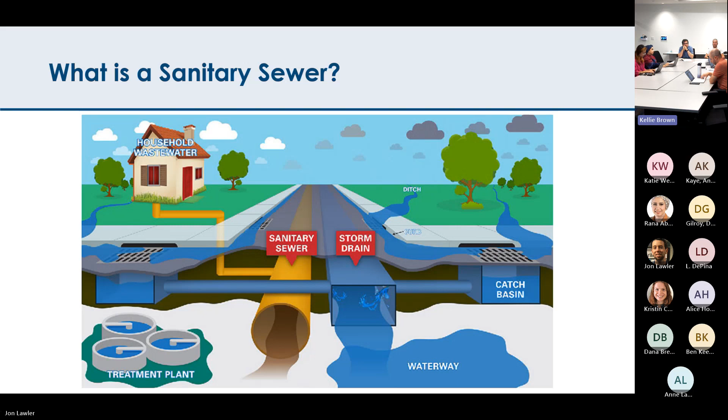That's also why you'll find both sanitary sewers and storm sewers in people's backyards, rear yards, and side yards. And that's where we run into conflict—sometimes people add additions to their properties, and there's a sanitary sewer too close to it.

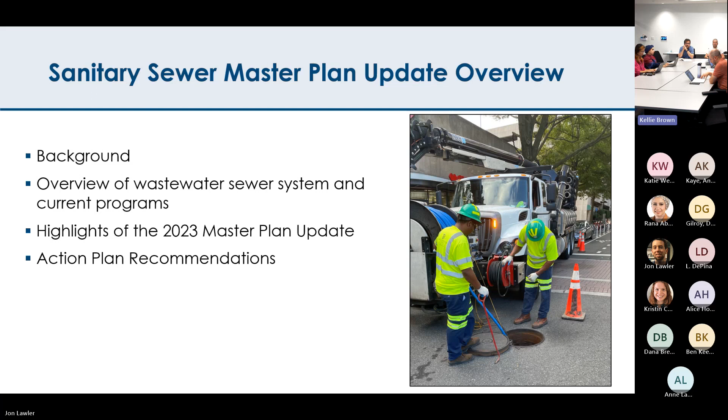I'm here tonight to present the sanitary sewer master plan update. I'll give background on the master plan, an overview of our wastewater sewer system and current programs, highlights of this 2023 master plan update, and then summarize our action plan recommendations. This is one of the 11 elements of the county's comprehensive plan—I know there's soon to be a 12th one coming with natural resources.

The comprehensive plan was established by the county board in 1960, originally consisting of 5 elements, with sanitary sewers being one of them. Your ability to grow as a county really depends on your sewer system and water system—those are critical utilities that can constrain things if not planned properly.

In Arlington, our sewer system began in 1933 when voters passed a referendum in November to create a public countywide sanitary sewer system. Prior to that, there were just a few private sewer systems spread throughout the county. People had septic tanks, outhouses, or outfalled private sewers into streams. The county built its whole network over about 4 years and built the treatment plant, which opened in 1937. So those are the origins of our system.

The master plan evaluates the system facilities, practices, programs, policies, and improvements needed to provide and maintain adequate service into the future. The most recent update was adopted by the board in 2002. This is a planning-level document; the primary goal is updating growth and development forecasts, looking at capacity assessment to ensure sufficient capacity for demands, identifying needed system improvements, and evaluating our ongoing rehab, operations, and maintenance efforts.

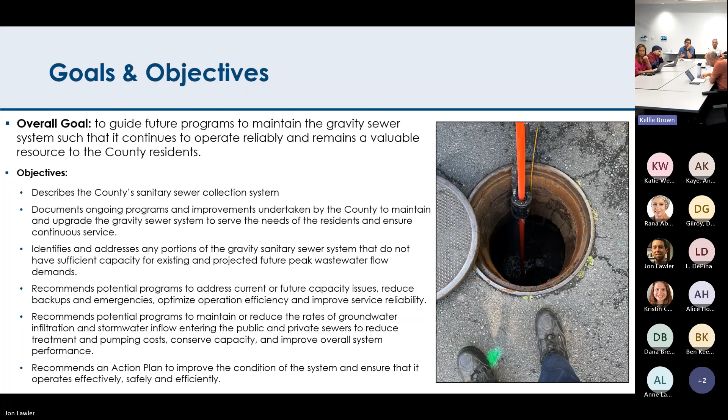So I'll start by giving an overview of the sanitary sewer system. It consists of 459 miles of gravity sewers. Basically a gravity sewer consists of a sewer main connected on both sides by manholes. We have approximately 15,000 manholes.

We have 15 sewer lift stations and about 4 miles of force mains. A force main is a pressurized sewer. You'll see a lot of those on Military Road where you have these big hills up and down, because by gravity you can't go up a hill, so you need to pump that up the hill.

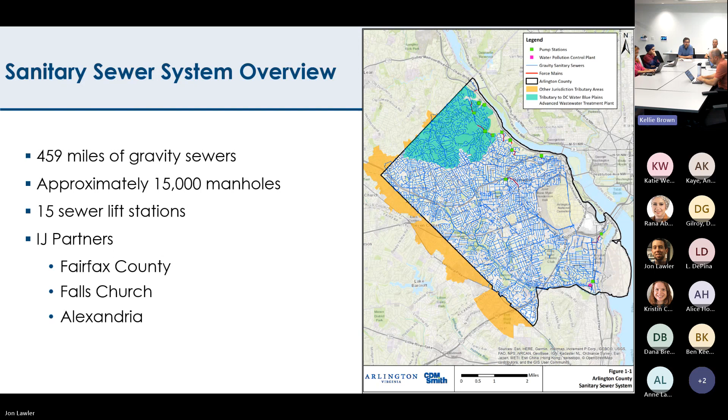We call these kind of like roadway networks - we have arterial streets, collectors, and local streets. In sewers, your interceptors are your arterial sewers, trunk sewers are kind of your collectors, and sewer mains are your local ones. Basically everything under 15 inches, like 8 to 12 inches in diameter, is local. 15 up to about 30 inches is trunk, and everything above 30 inches diameter is the interceptor.

So we'll talk about common sources of sanitary sewer infiltration. This is really critical in sanitary sewers because, as I mentioned, they're smaller than storm sewers, so they can get really overwhelmed if you have lots of stormwater and groundwater infiltrating into them.

Sometimes people put illicit connections like roof drains plumbed into the sanitary sewer system. We'll find those when we do our CCTV work. You might have uncapped cleanouts or cleanouts with vents on them to try to relieve odors from the house. And then you also sometimes have faulty manhole covers and frames that aren't watertight, or might have a hole or two in them to get them open. All that allows stormwater to inflow into the system.

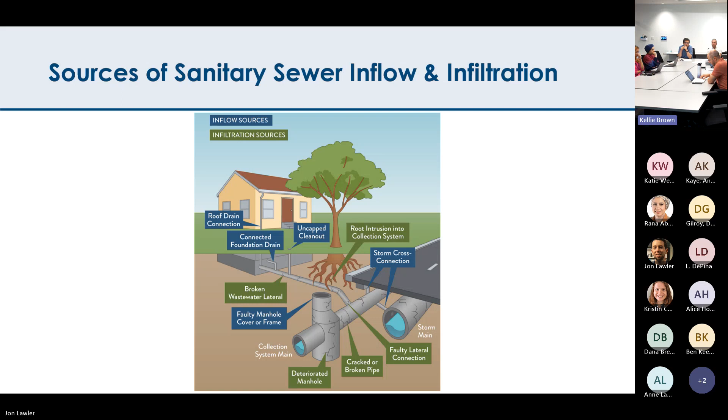Basically we were at 30 MGD back in the mid 90s, and now we're down to 22. MGD is million gallons per day, so that's quite a big reduction. We're permitted for 40 MGD, so we have lots of capacity there.

We began a really robust sewer lining program in 1998, intended to reduce that I&I I was just talking about. We think that's also had a big impact on reducing flows to the water pollution control plant. As I mentioned earlier, the area in North Arlington that drains to Blue Plains is only 1 MGD, about 5% of our total flow in Arlington. Even though it's a fairly large area, it's almost all just single family houses, so it doesn't generate much sewer flow.

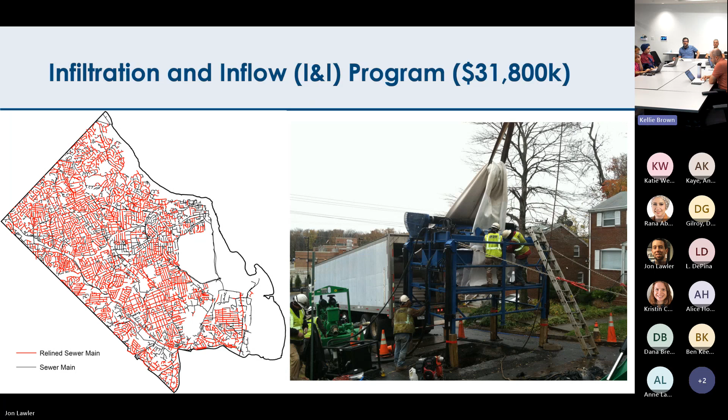It's not intrusive really at all to the residents, whereas if you were to actually dig up the road and replace the sewer main, that'd be a couple of weeks of parking restrictions and lots of dirt and dust, because these are very deep systems.

We're also just doing a couple percent per year so that we don't end up doing like half the county in one year, and then 40 years from now we'd be kind of screwed. So we're spacing it out really good to keep it well maintainable in the future. We're basically on track to complete all the small diameter linings by 2031.

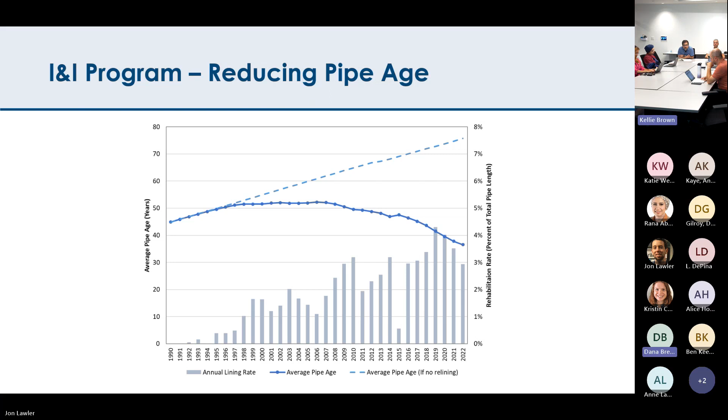That leaves larger diameter rehab - that program focuses on pipes that are 15-inch diameter and larger. These are much more complex; they require these intricate sewer bypasses. That's what you see in the picture on the right, where we have a sewer bypass, the 4-mile run interceptor sewer that crosses the 4-mile run trail.

So you have the trail temporarily elevated over the bypass. For the bypasses, these are just above ground - we use pumps to keep the sewer flowing because we've got to get that pipe fully dry and cleaned out before we install that liner. On the left, there's the liner machine.

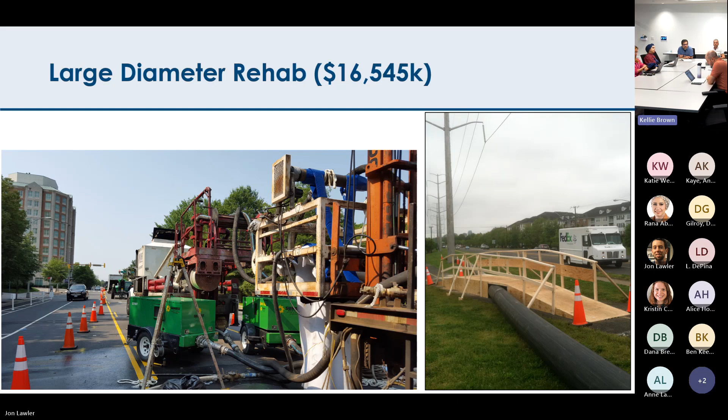From large, the CIP program includes inspection and rehabs. In the sewer main replacement program, that's where we have to dig and do replacements - typically spot repairs or new mains to solve certain design issues. That includes our stub elimination program. A stub is where you have people connected upstream of a manhole, but there's no manhole upstream of them, so there's no way to clean that line to serve those properties. We've knocked out a whole bunch of those, but we're still down about 300 or so left.

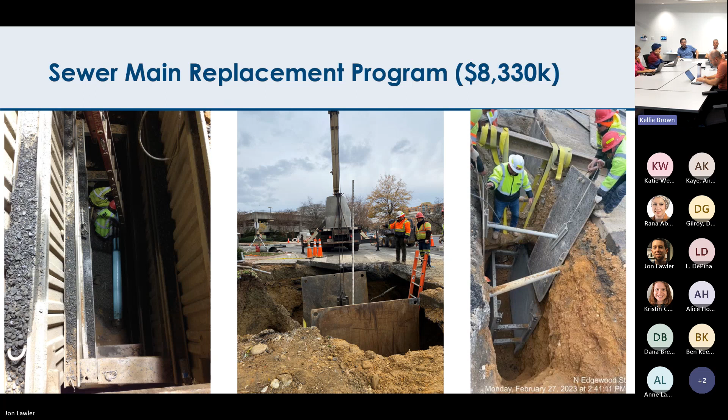Because there's all kinds of underground streams throughout the county that you don't know about, you end up encountering a bird's nest of dry utilities when you're digging that deep. Those are utilities you have to deal with when laying these pipes. It's very challenging, requiring a lot of specialized equipment.

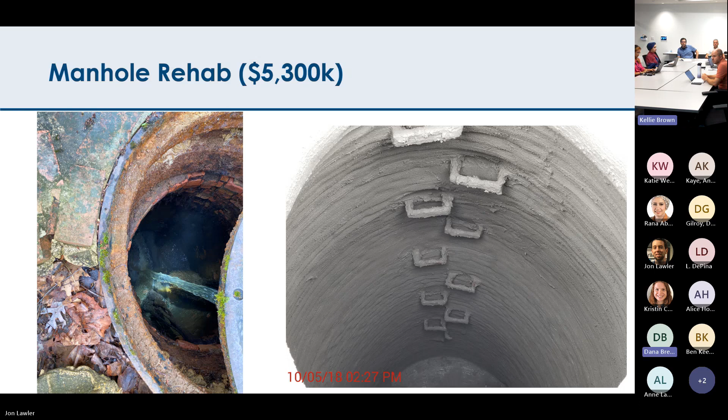Now I'll go over our preventive maintenance program. That's basically our biggest program for our internal staff resources, so this is what we spend most of our time with. We have 4 county crews dedicated to flushing sewer mains.

Flushing is really critical because most backups are caused by debris in the line, which blocks people's flow so it backs up into houses, and they call the county. So you go back out, flush the main, and that fixes the problem. These preventive maintenance areas are where we have to flush on a frequent cycle, made up of three programs: grease, trouble, and tree root.

Grease areas are on a 1 month or 3 month cycle. Trouble can be 30, 90, or 180 days. Tree roots aren't on a regular cycle, they're on a 5-year cycle. For those with tree root issues, we take a root cutting nozzle, put it on our flusher, cut all the roots out, and then put a root inhibiting foam into it. Every 5 years we go back and apply that foam, which discourages tree roots from getting into the sewer main and messing things up.

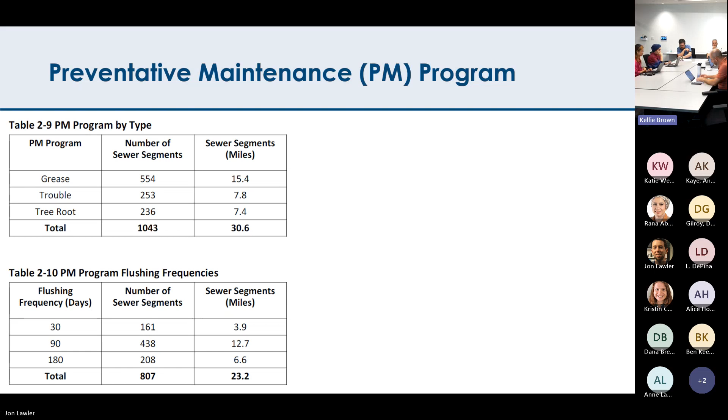The grease issue is obvious - that's where restaurants or caterers are dumping grease down the drain, which blocks up the sewer main, so we have to flush and vacuum it out. Troubles are usually where we have poor slopes - if the sewer main doesn't have a steep enough slope, solids can settle at the bottom and cause a blockage. Those are the ones we have to flush for that reason.

Things like that, and hopefully that will help reduce grease areas. But then you also see random red lines throughout the county, and we're investigating those to try to see which house is contributing to the problem, because obviously somebody is running like a catering business or something at that house.

Now we'll look at trouble. Like I said, these are the ones with inadequate slopes where you're just not getting that self-cleansing velocity. They're spread out all throughout the county, and by keeping these on a frequent cycle, we can prevent backups by servicing them often.

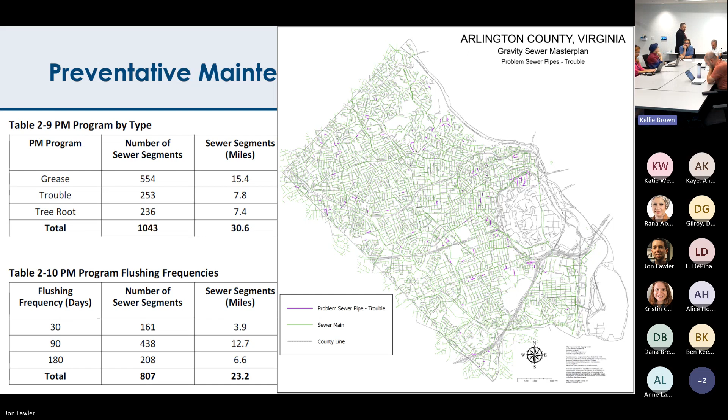Our other major program is the grid program. We spend so much time on these preventive maintenance sewers that unfortunately we don't have a lot of time for the other sewers. Our goal is every 5 years to flush every 12-inch diameter and smaller sewer at least once. Unfortunately, over the last 5 years, about two-thirds of the sewers we haven't even gotten to, just because we spend so much time on grease, trouble, and stuff like that.

So the master plan really tried to figure out how we can start achieving this goal. We basically need to adjust utility billing so that we can generate an extra $330,000 a year to give all these remaining segments to a contractor to handle.

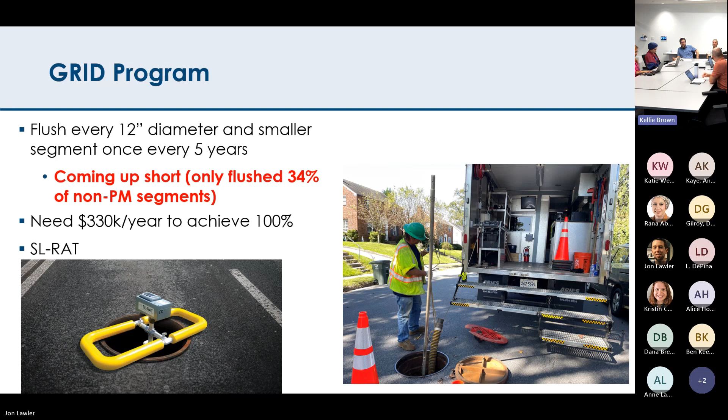The other picture on the left is the SLRAT. That's a little tool we use to see condition using an acoustic signal it sends. You put it in upstream and downstream manholes, it sends that acoustic signal, and that gives you a score. Based on that score, you'll know if you need to flush it or not - it just detects if there's a blockage in there, helping you decide whether a line needs to be flushed. But the downside is you also need traffic control, because sewers are typically in the middle of the road, so you can't just have that sitting out there with traffic going by.

That'd be considered very good. If you adjust for us, remember we're 459 miles, that would be 92 backups per 1,000 miles. So we're way under that benchmarking goal, which means we're doing pretty good. Some of this is also affected by how data has been reported by staff and turnover, so it changes a little bit.

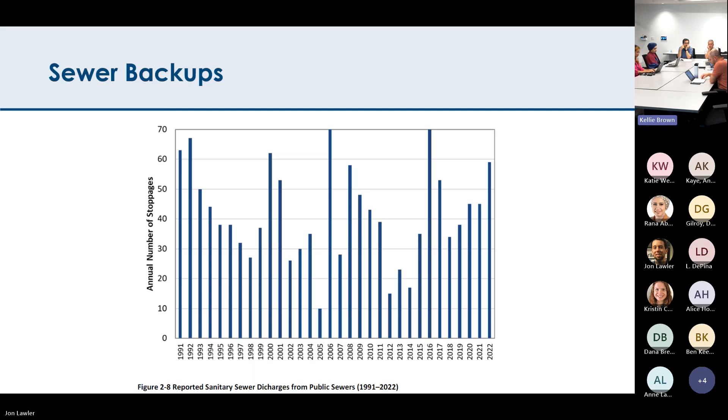So most of these backups are on the private side, where people's homes have issues and stuff.

Asset management is really critical to public works departments, making sure you're documenting all the assets you maintain, when you're maintaining them, how much it costs you, keeping records of all that stuff. We're really national leaders on that front.

We use this Cartegraph asset management system. So all our sewer mains are in there. We track all our maintenance activities. It has when the install dates were, when they were relined, when they were retired, when we flushed them, when we mined them, when we TV'd them, everything. We track backups in here too, everything now.

So for example, you click on a sewer main in the county and see the work history, and then it also calculates a life expectancy, and you can kind of prioritize your replacement program based on that.

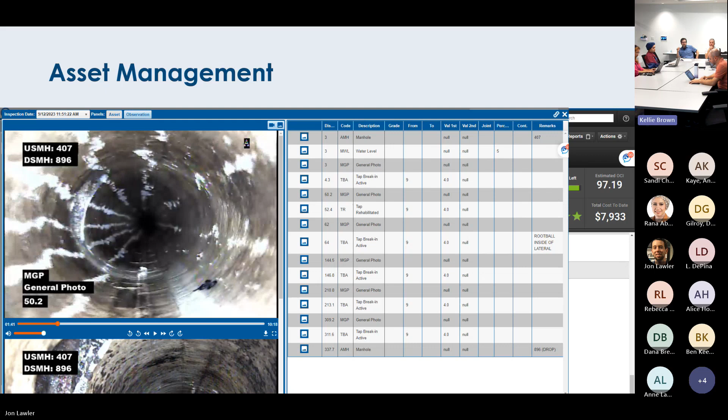Basically our operators use an Xbox controller to move a crawler inside the pipe, and every time they see a defect, they take a picture of it, make a note of it, and assign it a score. All our CCTV is electronically in there on the cloud, and it links up to Cartegraph.

Back to the master plan, one of the big things is just making sure you have adequate capacity for future growth and development.

As part of our master plan, our consultant developed a dynamic sanitary sewer system model of all the county sewers. Previously we had a SewerCAD model of just the larger diameter sewer, so this was a big upgrade.

So we can click on any sewer segment of the county and see the flow, the dry flow, the wet weather flow, any kind of flow, over the future conditions or the existing conditions. It's really a great, helpful software.

To calibrate and generate the model, they did a lot of flow monitoring in 2019, as well as using water billing information from that period. The water billing information is used to generate the dry flows, to know what's in your system during a non-rain event. Then the flow monitoring tells you how much I&I you're getting in your system during these rainstorms.

The future conditions model is the 2045 future condition model, based on the COG, the Council of Governments. They publish a regional population land use model, and the one we used was Round 9.1. That has the population and employment figures for Arlington County that they project for 2045, based on all our approved land use documents and stuff.

The only change we had to make was to add HQ2, because that wasn't quite in there. Based on what happened during COVID, that's now a very conservative model, but we still used it in our analysis.

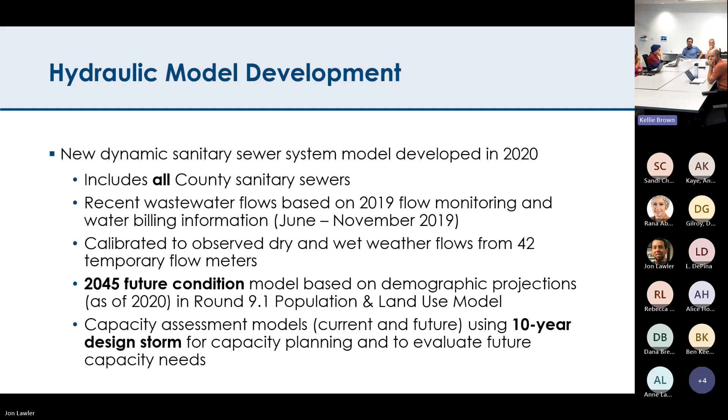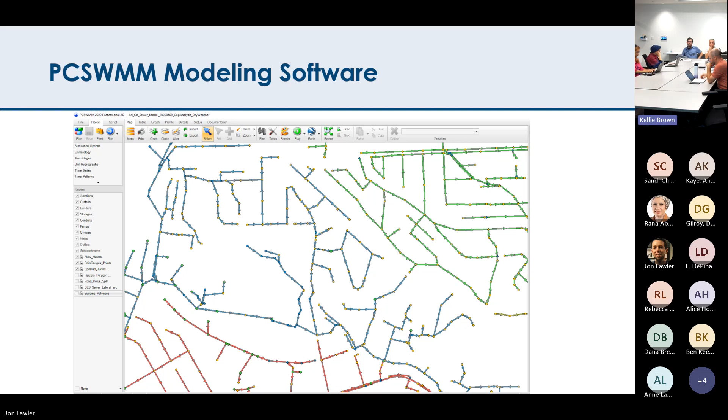Here's a shot from our modeling software, it's called PCSWMM. Just a shot of what it looks like - it's really easy to use and gives you a lot of great information.

The model found really great results - the county has excellent capacity with tons of spare capacity, probably because of decreased water use over the past 30 years. It showed sufficient capacity for both existing and future dry weather conditions.

We only had one simulated overflow in the 2045 wet weather conditions. An overflow is when sewage would be shooting out the top of a manhole. We also had 3 surcharging sewer segments in the 2045 wet weather conditions, but they still had more than 1 foot of freeboard, meaning nobody would actually be backing up in those spots because it would all be below where buildings connect to the pipe.

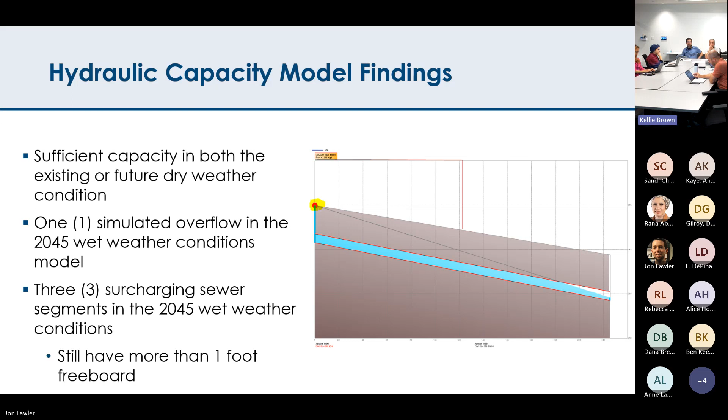I'll talk about where the overflow was simulated. That was on North Oakland Street, just south of North Glebe Road, kind of up near Ethan Allen Pump Station off Military Road - that's where our Gulf Branch force main outfalls into the gravity sewer.

We actually have plans right now to upgrade that pipe so we can resolve this issue. That project will start construction in spring of 2024.

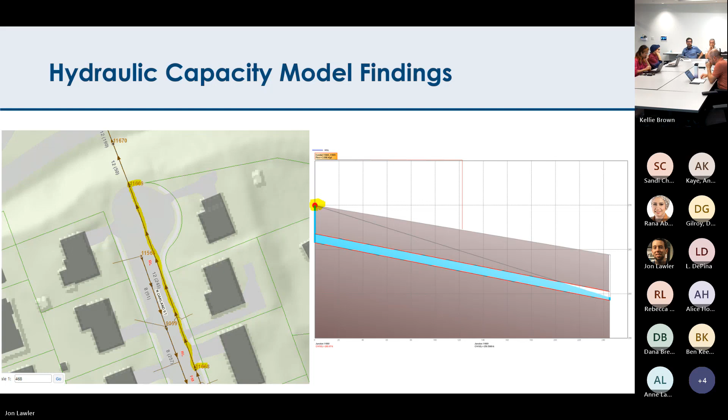Lastly, I'll summarize our action plan recommendations. These are developed in more detail in the actual plan document, but basically we want to achieve that GRID program, so we want to increase our operating funding by $330,000 a year to do that.

We want to add flushing of all our 15-inch and 18-inch diameter sewers once every 5 years. That's actually not very expensive, like $33,000 a year. Our crews don't touch anything larger than 12 inches because there's so much flow in there, and it's just very toxic, so we use contractors for the larger diameter stuff. You really don't need to flush things larger than 18 inches because there's so much flow that it keeps itself clean, unless you get some huge blockage. The contractor has great equipment to flush the 15 and 18 inch pipes, and it's only $33,000 a year, so we thought that was a good thing to add.

We'd like to accelerate our large diameter inspection from 2.1 miles a year to 4.4 miles a year, so over the next 20 years we can see all the remaining large diameter pipes we haven't looked at. Large diameter inspection is more difficult because there's so much flow in the pipe that you almost have to bypass it to get a good shot. If you do it under flow, you're only going to see about half the pipe, so you'll miss a lot of defects.

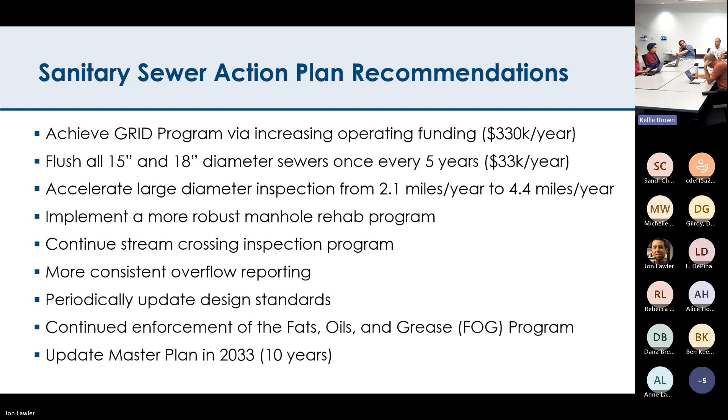Continue enforcement of the fats, oils, and grease program, and update that as needed as it gets older. Then just update the master plan again in 2033, which would be 10 years from now.

Really our next steps are to hopefully do the request to advertise hearings this fall, and then go to the county board for adoption at the December 16th meeting. You can provide comments on the sanitary sewer master plan, or just Google Arlington County Sanitary Sewer Master Plan and it'll take you right there. Then you can email me your comments at jlawler@arlingtonva.us. If you have any questions, feel free to contact me.

Thank you very much. Since now, do any of the commissioners have any questions or comments about the proposed plan?

I have a couple. Glad to see that you're now telling the story about our capacity and that you plan for the future on this. My takeaway is that at least through 2045, both our sewer system and our sewer treatment plant have more than enough capacity for the expected population growth. That's correct. Okay, and that our sewer system itself is in pretty good shape, that we've been renewing it over the past number of years so that the large majority of sewer lines are effectively new. Yep, okay good, that's good to know.

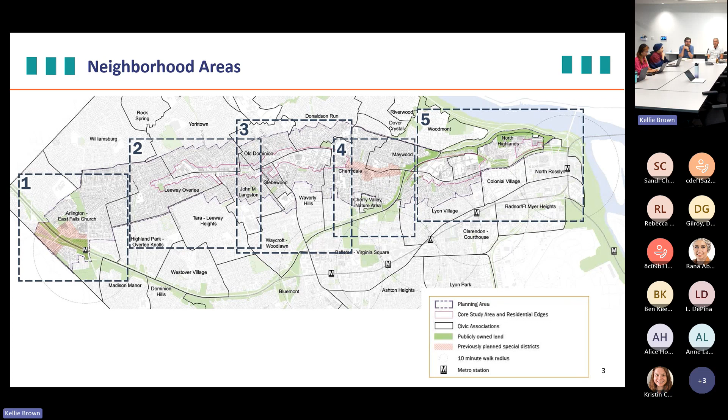As I'm sure you're all familiar with, we have been looking at the Langston Boulevard corridor over the course of several years to develop a new plan for the corridor. This is the entirety of the planning area, shaded in dark gray, with the distinct neighborhood areas indicated in these boxes on the screen. We have been in this planning process for several years.

We are drawing near to the end, at the end of phase 3, drafting the plan, and really moving into refining the plan and recommending plan adoption, which also is recommended to include certain implementation items to allow for the plan vision to be realized. That's what we're here to discuss tonight. The planning process has resulted in a plan vision that's being recommended in the plan.

I don't necessarily need to go through all of this material. I think it's been presented in the past at different LRPC meetings and in the draft plan. But I did want to mention it tonight, that it's really anchoring what we're recommending in terms of general land use plan amendments, sustainability, environmental resilience, and equity at its foundation.

There's also policies and recommendations in the plan in distinct issue areas: land use, economic vitality, housing, public schools and facilities, building form, historic and cultural resources, and with regards to the public realm, transportation, connectivity, and urban design, public spaces, and sustainability and resiliency. The plan also includes design guidelines and principles that should guide future reinvestment on the corridor. So the plan does have specific goals for each of those topic areas.

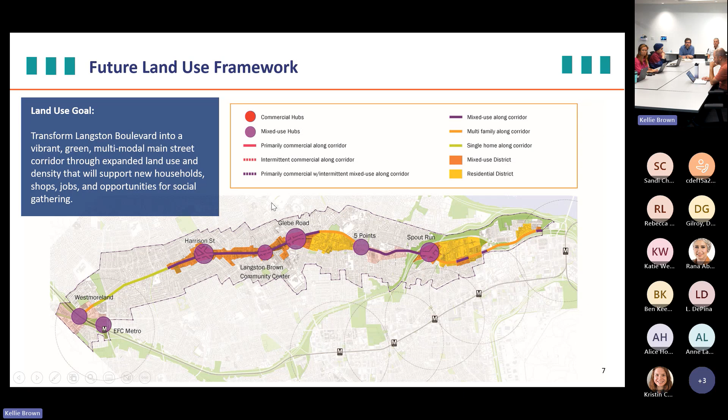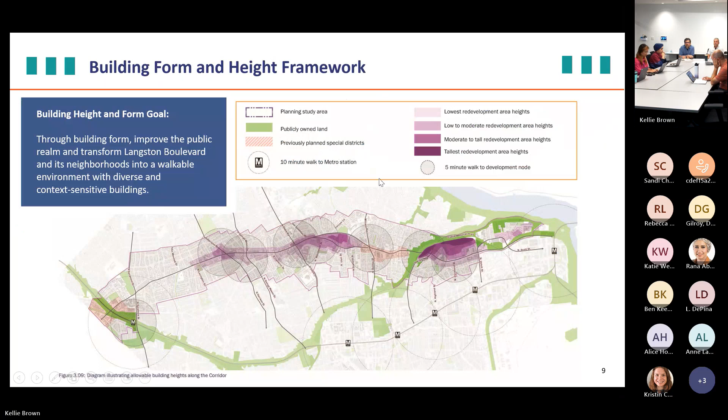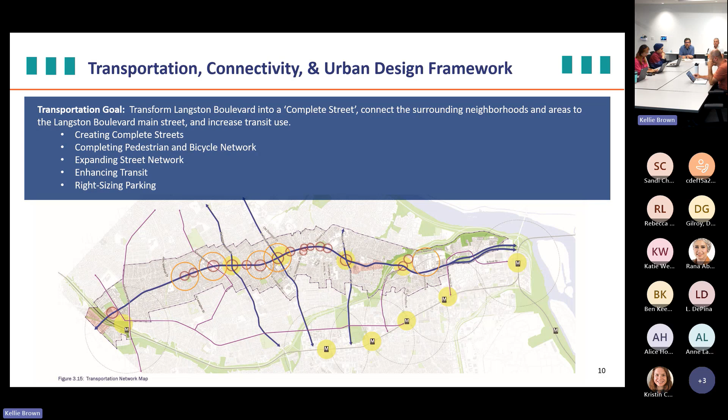There's a specific goal for land use to transform the corridor into a vibrant green multimodal main street for expanded land uses and density. There are goals for housing to expand equitable housing choices. Goals for built form and height. Goals for transportation, connectivity, and urban design, really transforming the corridor into a complete street that connects with the surrounding neighborhoods and increasing transit use.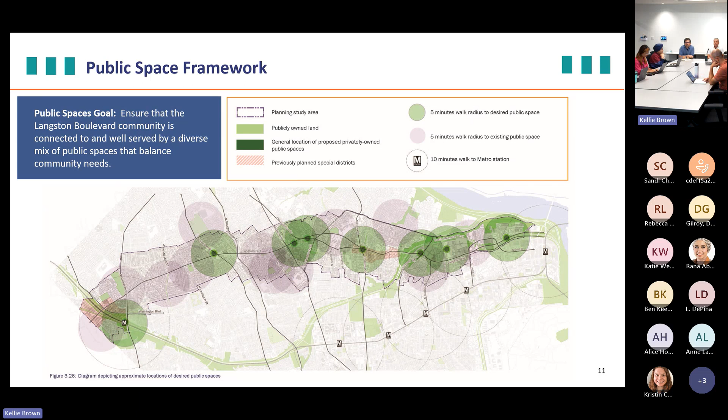Goals for the public space network to ensure that the community is connected to and well served by a diverse mix of public spaces, balancing community needs. And goals for sustainability and resiliency, also within the theme of creating a green corridor, meeting goals for conserving and expanding tree canopy, reducing energy use and emissions, and managing stormwater and promoting water quality.

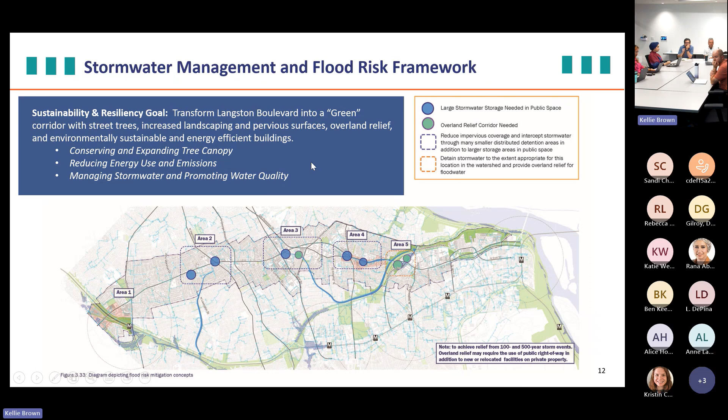So the implementation items that we're here to talk about tonight are really intended to communicate the new planning vision for the Langston Boulevard corridor, and the policies and recommendations on the general land use plan and the master transportation plan. And secondly, to amend the zoning ordinance to encourage reinvestment consistent with the plan, vision, and goals.

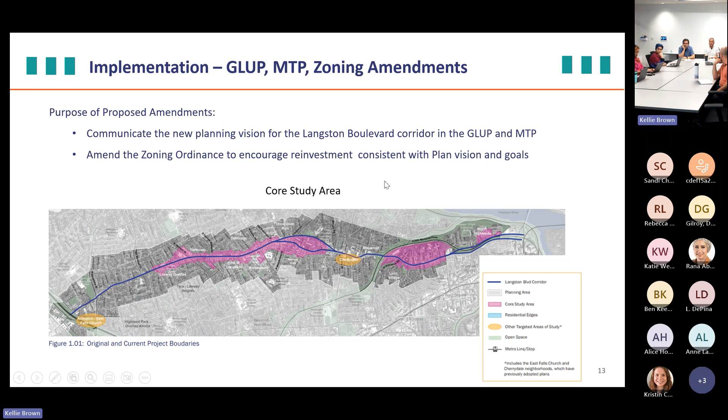And the focus of these recommendations is within the core study area, which is the area identified in the plan as recommended for change over time, and where the plan, vision, and the goals correspond.

So as we look specifically at the general land use plan amendments, they fall into four main categories that we're recommending. The first would be adding a new Langston Boulevard planning district to the general land use plan. This would, as I mentioned before, encompass all areas within the new planning vision, both the mixed use district and the residential district as they've been identified in the plan.

And this would be accompanied by new text in the general land use plan booklet, articulating the vision and the goals for this area. We are also recommending to add Langston Boulevard as a planning corridor to the back of the GLUP map, as a fourth planning corridor in the county.

The second category of amendments would be adding open space triangles to identify the locations of all planned open spaces. The third category is to remove the housing conservation district designations that currently exist on the corridor where there's overlap with the new Langston Boulevard district.

And the purpose of this change would be really to help clarify the plan goals for these areas, that we are seeking to maintain the existing residential nature, but promoting increased density to expand housing choices, increase supply, increase committed affordable units, and also achieve other plan goals.

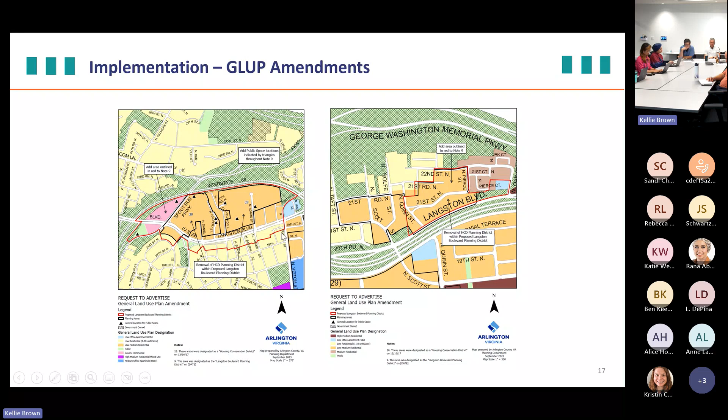The next part of the presentation covers our master transportation plan amendments that we're recommending, and Kristin Calkins from DES Transportation is going to cover these slides. Hi everyone, Kristin Calkins, as introduced.

We're going to be making some modifications to the MTP as well to support and integrate the recommendations made in Plan Langston Boulevard. The first is related to the MTP map and areas planned for new streets. We're going to represent areas on the map that show where we want to see a new grid created in our activity areas for the plan. The second is for areas where we're planning bike lanes on Langston Boulevard where we hadn't in the past.

Those are on 2 different segments. One is from North Quincy Street to Old Dominion Drive, and the other is from North Culpeper to North Lexington. Those are places where, in our cross sections, we think there's room — one through repainting and reconstruction of the roadway within its existing right of way, the other through expansion of the right of way through redevelopment — for bike lanes to be accommodated.

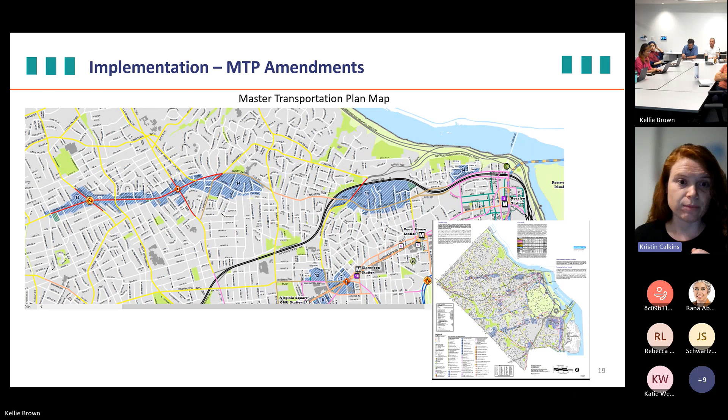The next slide shows where we're adding additional bike lanes. If you look at the map, between that new hatching from North Quincy to Old Dominion, and then at North Culpeper to North Lexington, the dotted bike lanes have been extended for the recommendation on the map.

Thanks, Kristin. This last category of implementation recommendations is for zoning ordinance amendments. With plan adoption, we're recommending 2 zoning ordinance amendments. The first is to permit townhouses by site plan only in the RA 14-26, RA 8-18, and RA 6-15 zoning districts in the Langston Boulevard Planning District.

The reason for this is that townhouses are currently permitted by site plan only in housing conservation district areas, to encourage conservation of the existing multifamily housing there. When we remove the housing conservation district areas within the Langston Boulevard Planning District, townhouses would become a by-right use again with no other action. Staff is recommending this zoning ordinance amendment to reinstate site plan only permission for townhouses, because townhouses by site plan only would limit forms of development inconsistent with plan goals, which are better achieved through multifamily housing. Moderate to higher levels of residential density help support urban and pedestrian oriented streetscapes, consolidated public open space, and a coordinated multimodal planned street grid.

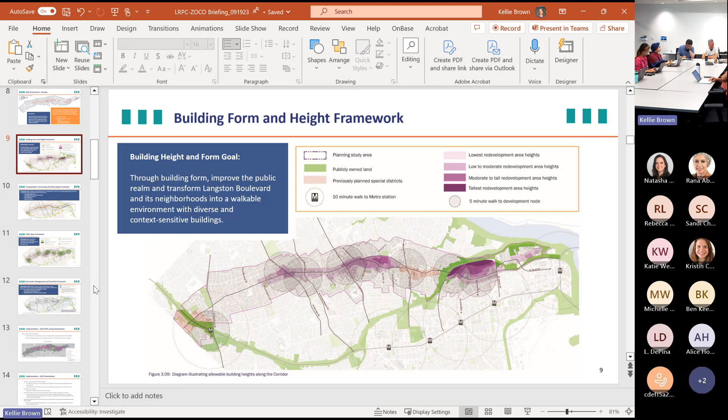We mentioned TDRs in here, which is great in the staff report. We're happy to see that. We list a number of reasons that TDRs could be used. Beyond those mentioned, would we be limited to TDRs for those things that are mentioned, or could there be other uses such as open space?

TDRs - so we've identified study of potential for transfer of development rights as something, an area of future study. We're not going to be bringing forward any specific recommendations related to TDR. So we're not definitely limited at this time. Okay, that's good. Again, what I'm trying to raise here is for RTA purposes, so we have a full understanding of where we're limited and where we're not. So that's good to know that we saw flexibility there. Thank you.

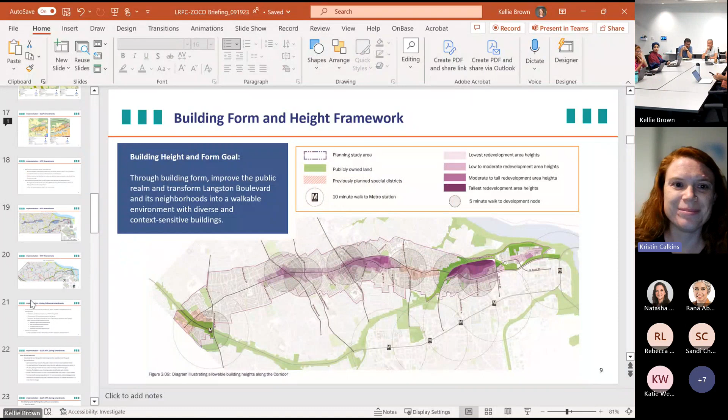Ms. Calkins, are you still there? I have a couple of questions for you. I'm here. Okay, great. First off, Langston Boulevard between essentially Rosslyn and Spout Run or I-66, is there provision for bike facilities along that wide part of Langston Boulevard on the MTP? So that is - there's lots of right-of-way. Let me pull it up on my screen. Before I say something that I need to double check, there are already bike lanes planned on Langston Boulevard along that segment.

Right, we've already got the blue. There's one that's already striped. If you zoom in on this slide, you can see that there are already the blue hashed lines on Langston Boulevard there that are included in the map. Okay, great, thank you. That's good to know, because I wanted to make sure that we still were taking advantage of that extra right of way there.

When you mentioned the other ones being added, those two other sections, which again I support, I think it's a good idea - are we talking about simple stripes on the road the way we have in Cherrydale, or are we looking at some sort of separated bike facility?

The map itself here is not that prescriptive. It just says that we're doing on-route bike lanes. That's something that through the design process we have cross sections in Langston Boulevard that we're recommending, but the map itself is not that prescriptive. It gives us the bike lanes are planned here, and in the future we get the opportunity to implement bike lanes because of that on a VDOT facility. Great, thank you very much.

For the cross-hatched areas, which again I think is a good idea, I'd like seeing those. Within the draft plan itself, we have shown certain areas where streets could go or would go. The crosshatch clearly does not mandate those being in those spots. So we can be comfortable in saying that the draft plan, by showing those routes, those are one possible option, but not a requirement that they be located where they are.

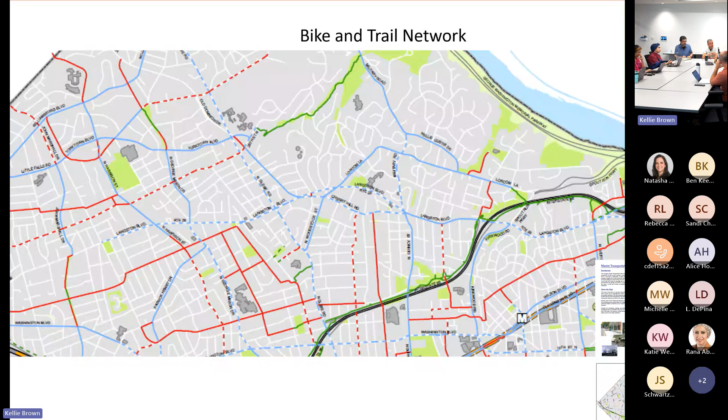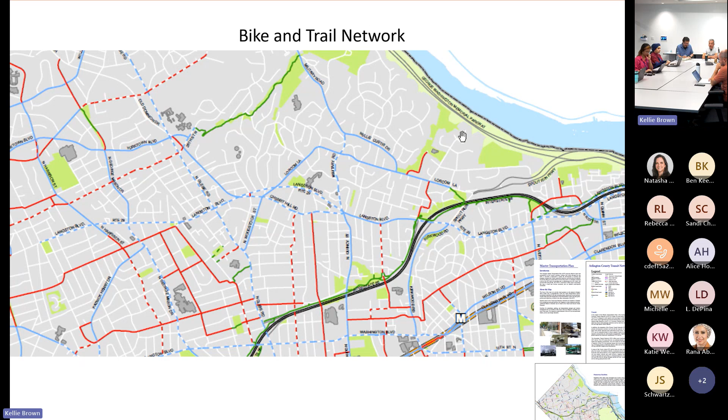Good, I want to make sure everybody understands how that works. Turning to Cherrydale, those few sites there, under the current Cherrydale area plan, could have been redeveloped into something way more dense than what's there now. By removing them, we're allowing more density, but somewhat less than what could have been built under the Cherrydale district. Even allowing EHO, which is what we're doing, we can allow more density there, but less than what otherwise would have occurred in the Cherrydale revitalization district, theoretically. Okay, good, I just wanted clarification on that.

Right now, that's what I'm thinking, so I just associate myself with the sentiment of...

Retaining the site plans for these three districts that you mentioned, Kelly, I think that's right. It still aligns with what we were thinking back in 2017 when the district was established, so I think that's the way to go. I also think we need to be thinking about ways to maintain some of what we already have there, and it does make it a little more difficult if it's going to be site plan only for redevelopment. We thought about that on Columbia Pike as well. CAFs are important, but we're thinking about housing, especially affordable housing. It's much easier to preserve what you have if it's working.

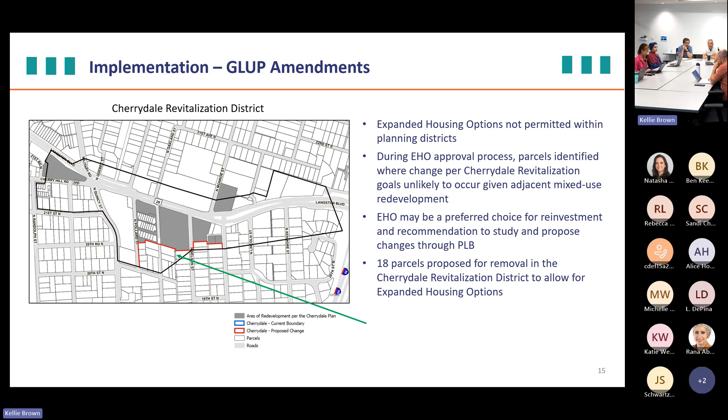One question I do have: in one of the implementation strategies, you talked about a special exception approval process in areas of lesser change, up to 5 to 6 stories. I know some folks along the corridor are concerned about legacy businesses or areas where retail is. Are we concerned that if we provide a streamlined process, maybe it's a different policy goal, but I'm not sure everybody wants to see those shopping centers immediately turn over. Are we worried that by making it easier through a streamlined site plan or use permit, we might turbocharge some redevelopment that some folks wouldn't want to see happen? That's a big question.

I think what this plan offers is a variety of choices, not just a one-size-fits-all full redevelopment, whether in the multifamily or commercial area. Getting to a place where even renovation, infill, or building expansion is possible, but doing it in a way that's not just the result of by-right development options. So would we start to see transformation of the corridor? Some would say let's keep everything as is, and I'm sure that will be the sentiment of some, but I think to fulfill the multimodal vision and expand access for all modes of travel, bringing more households and residents to the community can help support existing businesses, or possibly help them find a new shop front. Those are the objectives we see as possible, and still view positively.

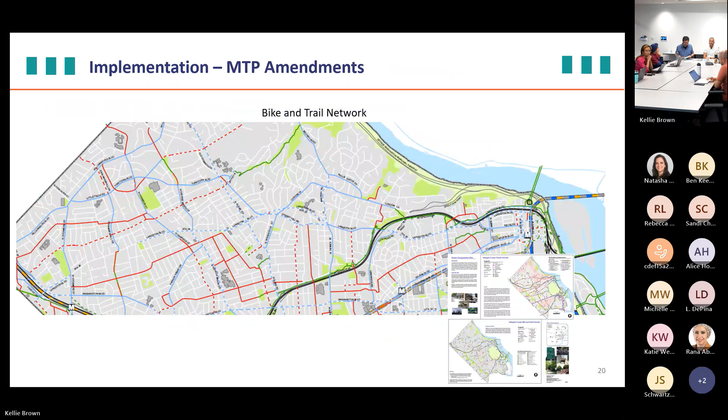One of the open houses, one of the property owners that abuts the core area wants to actually be included in the core area. Do we know whether that change has been made? It was a single family house property. They saw it — no, not Cherry Hill.

I have a similar clarification question on maps and sort of the outlines of the heights and how you implement that. Like, let's say half of a property is on like a 10-story and the other half is on a 7-story. How do you arbiter that line when push comes to shove?

So happy to answer that. We have very specific recommendations for step backs, depending on whether you're adjacent to or across the street from low density residential edges. Those step backs are setbacks for the ground floor and podium part of the building, but they're also very specific in the guidelines. So when you're looking at a site, you have to look at the overall dimensions, and as long as the building conforms to the step back requirements, we're looking at those dimensions specifically for a site.

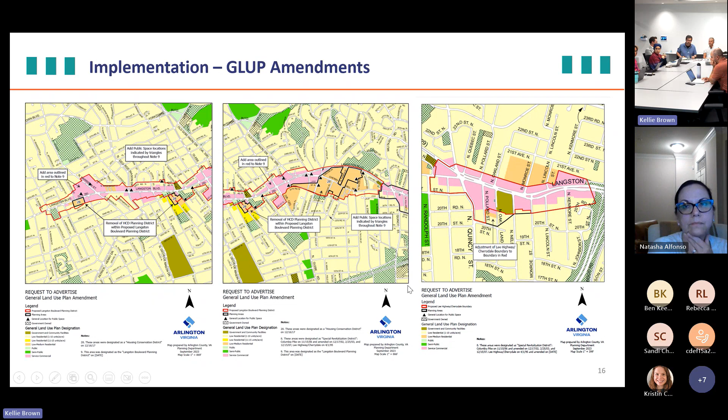Yeah, I think that's good. And then this is coming before the planning commission in October, with the request to advertise. Okay, and then at the end of October, first of November, for final action. Because we do the request to advertise first, and then we'll come back for your final recommendation that would go to the board for final action - so that would be for your meeting associated with the November county board meeting. Perfect, thank you.